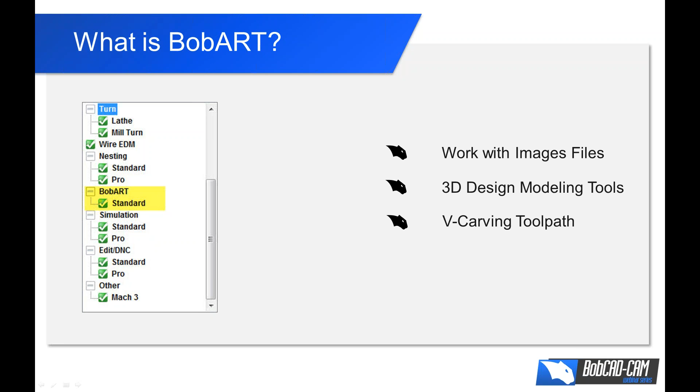We're going to take a look at how we can use each of those different aspects of the software. If you aren't sure whether you have BobArt or not, you can go to your license and see whether it's checked on or not. If you want to add BobArt, it's very easy to add. You make a purchase, they unlock it to your license, and you'll have availability to it.

The next thing we want to look at is who uses BobArt? Well, BobArt is used by anyone working with image files and non-mechanical elements of their designs. Common for woodworkers, job shops, manufacturers, and more. It's probably our most popular software, and anybody with a CNC that wants to do some cool artwork, engraving, or logos, BobArt's for you.

Now, what are you going to learn today? Today's webinar is an introduction to the 4 main features or tool sets that BobArt brings to the table. We'll go through a sample of each, so you have a working knowledge of what can be done with BobArt and how you might use it in your shop.

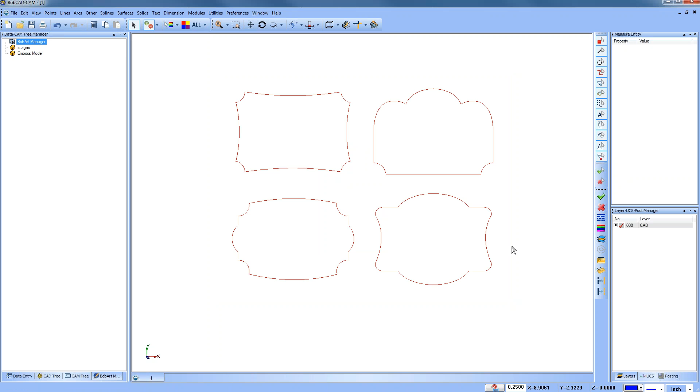So in this example here, we can select some of these different colors here. We can go ahead and delete them. We can select our color white. Maybe we'll change the color of it to gray so you can see how we could grab the center line for it, or we could grab the outside shape. So I just wanted to bring that up. That's something that you do have to pay attention to.

The next thing that we want to talk about here has to do with what's the difference between vector-based files and raster-based files. Well, vector-based files are going to be made up of lines and arcs. If we look at our entity summary here, you'll see that there's 422 or 424 entities, 158 lines, and we have 266 splines. So vector-based files are going to have lines, arcs, points, splines, that kind of geometry.

Now, raster-based files, those are really going to just be pixels. They're pictures, and there's a lot of different types of pixels and pictures as far as file types that you can work with. So where can you load in the raster-based files? The raster-based files you can load in from the BobArt Manager. You can choose Load Image, and then you're going to have all of these different files that you can work with.

One way you can do it, again, is from the BobArt Manager and load images. The other way you can do it is from Images and choose Load Images. Both methods will get you there. So we have our raster-based files. Now, as far as the file types that are supported, there are a lot of different file types, JPEG, bitmaps, TIFFs, GIFs, PNGs, PSDs, and then like 30 other ones that I don't typically use. So you have a lot of different options in here.

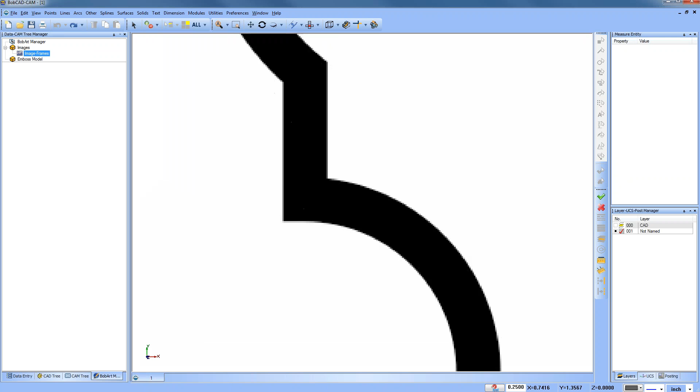All right, so what do you have to watch out for in raster-based files? So let me go ahead and load up an image here. It's going to come up on the screen, and then I'm going to zoom in, okay? So if we zoom in, you're going to notice that there is some blending on the edge of this part where it goes from black, and then it gets lighter all the way out to white. The best image-based files to convert are ones that have a lot of contrast. That's really what you're looking for.

A question did come in about the BobArt Manager in BobCAM. I'm not sure of the exact workflow of BobCAM right off the top of my head, but it is very similar. It's a little bit different because you have to align to a sketch, and I may post a follow-up video for you on that or look back to some of our webinars to explain that, okay?

So again, raster-based images, they're pictures, they're made up of pixels, and what you're really looking for is good contrast, because the better the contrast is, the better the conversion process. You can work with black and white photos, you can work with color photos, so it's definitely important to understand the quality of the image that you're working with.

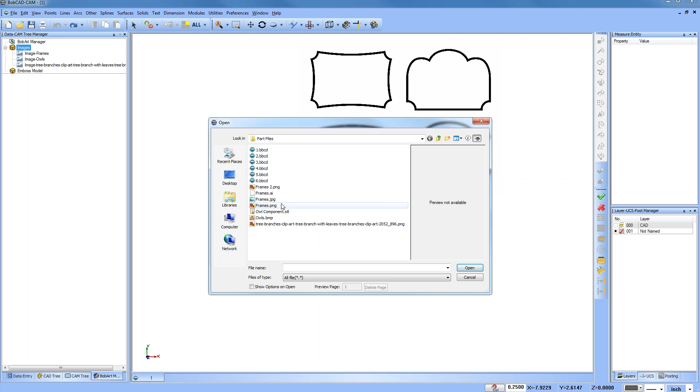Now, another thing you may not know is you can also load in, so I'm going to go to images here and I'm going to go to load, multiple files as well. So I'm going to grab this owls image. I'm going to come in here and grab a tree branch, and I'm going to load in another one. So one of the things that's kind of cool about this is you can take different design elements that you may want to work with, different logos, frames, characters, or whatever it is, and you can load them all up into one file. I feel that this is a very useful tool that you have.

Now, right now, all of these images are loaded on top of each other, so you can go to each one and choose blank and unblank. What that will do is blank them out, and then you can choose to unblank. Again, this is a right click. This one here, I believe this was the PNG file. If you look at the contrast of this image, you see a lot of different shades of black and gray. What the software's got to do is figure out how to join lines and arcs for that. So again, the better contrasting images do give you a better result.

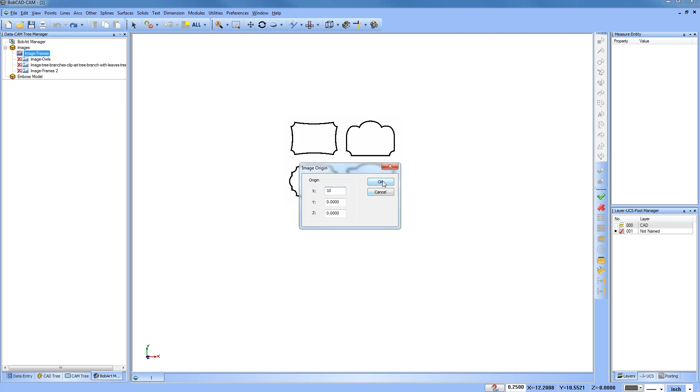Now, one of the other things that we want to look at is right now all of these images are kind of stacked on top of each other. So you can also change the origin of the image. When the image comes in, it comes in right on 0, and then you can change the origin. So we could move this maybe 10 inches over in X. We'll unblank this one. Now we can see that one. So we're going to change the origin, we'll say minus 10 inches, and then we'll push that one that way.

We got our tree branches here. We'll maybe change that one, and we'll say minus 10 in Y. And then we can open up this other one here and either leave it where it is, or move it up as well. So we're going to move this up 10 inches in Y. Okay, so now we have multiple images, we can blank them, we can move them around so that we can start working with these raster files.

Okay, so we covered change origin, we covered blank and unblank. Now, there's another thing that you can do with these images. You can see this one is smaller than this one. You may want to edit that image. Now, generally, when you're editing, I recommend you do it in a program outside of BobCAD, and you do it before you get into BobCAD.

But you can go to any of these images, and you can choose Edit using Paint. It'll open it up in Paint, and you can rotate and scale it, make it bigger, make it smaller. You can save the file, close it, and then it will update for those changes. Okay, so if you did want to make some adjustments to the image, you can do it while you're in the BobART software.

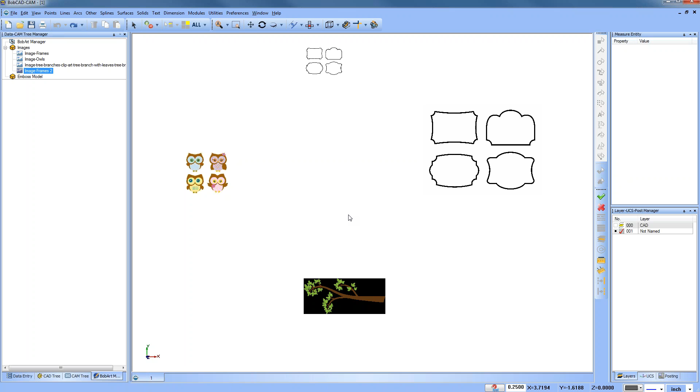Looks like we're good. Okay, so the first topic we covered is working with image files. We brought in a variety of different image files. We talked about the different types of files, some of the benefits, some of the differences, things to look out for, and how to move them around on the screen, okay? Now we're going to talk about converting images, okay?

So like the AI file, when we bring in the vector-based files, they're coming in as lines or arcs, so we can go ahead and edit that and start working with it, okay? So that in itself is really simple. We just need to check for double entities and clean up the geometry. When we're working with the image-based files, we need to convert it, okay? And there's two ways to convert it. One way is tracing, the other is vectorizing. So the first thing that I'm going to talk about is tracing.

Now you'll notice a little trick that I'm doing here. I'm doing this with my keyboard. This is I on your keyboard. If you press I, the image visibility goes away so you can see they're hidden. And then if you press I again, you'll see that they come back up. Okay, so this is a great way to load an image in the background, be able to trace around it and hide it, and I'll use that quite a bit.

Now, the first group that I'm going to go to is this group over here, and what we want to talk about is using line sketch. So you load an image up in the background and you want to trace it. There's a bunch of different tools that you can use, but the one that we want to talk about to begin with is going to be line sketch, or maybe line continuous. These are very good tools to use in order to trace around the part.

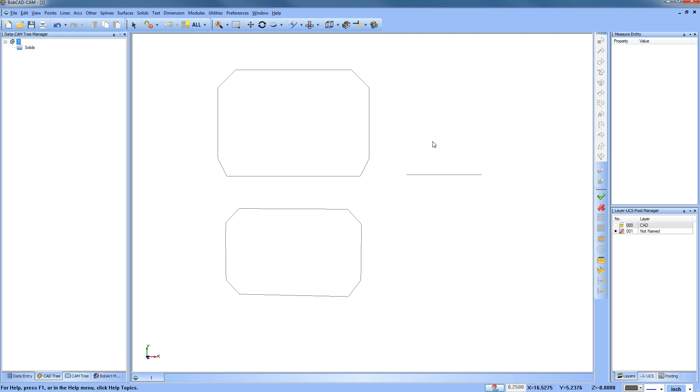Now, the next thing that I want to talk about is splines. Splines is probably one of my favorite tools that I use to trace around images. There's a bunch of different splines that you can work with. I'm going to choose the fit spline. Using the fit spline, I can plot out points on my screen to represent a curve or a shape that I'm trying to work with. So again, this is a pretty useful tool that will allow you to trace around images, and then you can use I on the keyboard in order to show the image or not.

Give me just a second, guys. All right, sorry about that.

Okay, so I on the keyboard to turn things on or off, and you can use splines to follow more curved shapes, okay? Another tool that you have is, once you get some of the base geometry down, what you're going to want to do is modify some of the geometry. There's a bunch of different ways to do it. We're going to talk about drag corner.

Drag corner is a great way for you to grab a corner of your geometry and then be able to move it. So this way you can start moving your geometry into the shape's geometry as such. Okay, so again, this is a quick tool that you can use to grab the intersection of geometry and move it to where you want it to be.

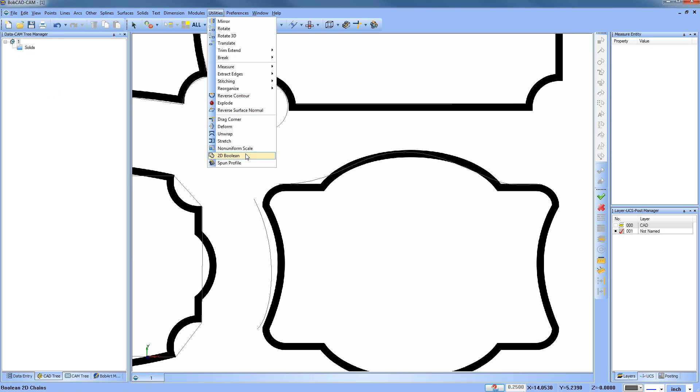Now the other thing with deform is I can go into this spline here. If I go deform, I can click on the spline and I can start dragging the spline into its shape as well. So that's another very useful tool when you're converting images. All right. Now the other one I want to talk about is entity modify.

So if you have a line or arc that's on the screen, you can select that line or arc, and then you can go to entity modify, and then you can change its radius amount, its center position, and this works for single entities. This again is a very useful tool.

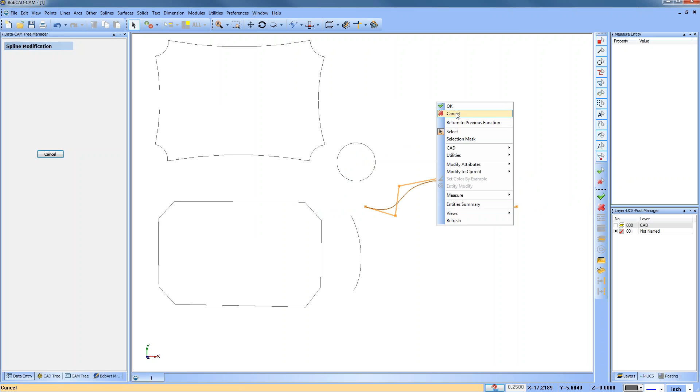The other one you can use it for is with splines. If you do entity modify, all the control points come up so that you can pull on these control points, and again it's just another way to modify your curved profiles. All right, so that's what we're looking at on that. Are there any questions about tracing, some of the tricks that we have for tracing? Anything that you guys think of, just go ahead and write it in the question box there.

These are very common tools. I'm very familiar with using these tools, and really using this workflow, there isn't really much that you can't do, okay? So in other words, if I go over to this shape here and I start looking at the splines, this is probably a better example of using the spline. I can come through and kind of click through close to where I want it to be.

Then I can come back and select the spline and go to entity modify, and then I can use my control points in order to get this closer into the profile that I want to work with. And you can zoom in or zoom out. You'd kind of get a knack for how many points you need to create and when you need to create them. But again, this is a good way to take more complicated shapes and be able to generate splines through them.

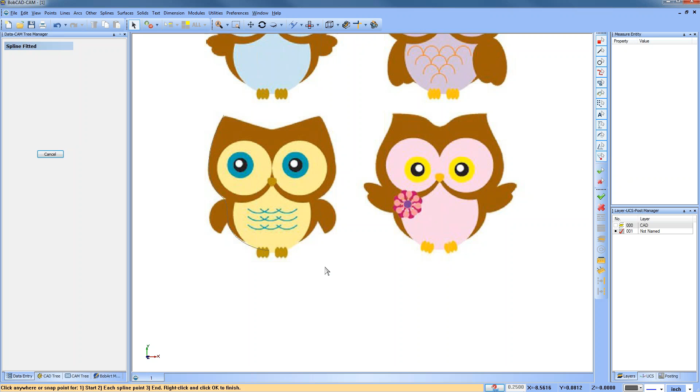Okay, if we go over to this section here, same type of scenario. It might be really difficult to create a series of arcs for that. So this is another great example of using the splines, so you can kind of click them out and be able to follow over the profile. Okay, so tracing is more of a manual based process, but a lot of times you're going to find that this is very useful in order to get some more complicated geometry or just portions of your geometry.

Okay, is there a simple select image and trace, aka simple trace? We don't call it simple trace, but that is the next topic, so that's a great segue, Curtis. The tracing methods are manual, where you load an image up and you use your general wireframe tools and you trace over it. The next one is the vectorization, and the vectorization is an automatic process. So any of the images that we have within the tree, you can right click on it and then go to vectorize, and this will bring up the raster to vector conversion or the vectorization process. Okay.

Robert had a question. Can you add additional points to an existing spline? You cannot add additional control points to a spline. You can break a spline into multiple points, but you can't add additional points to a spline. Anthony had a question. Can you use line join on different splines and lines? You can use line join on the end of any endpoint, or I think snap points too. So again, manual process is tracing, automatic process is vectorization, okay?

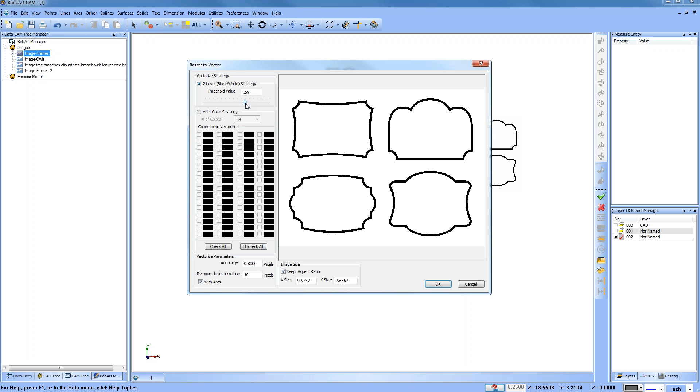When you get in here, there's a few key areas that you want to look at. You have a threshold value here, and the threshold value really is going to depend on the image. The threshold value that you set will determine some parts of your design that are white, and some parts that are black. It's kind of like a contrast tool, and depending on where you have this set, it changes your image depending on the contrast of your image.

You'll also notice there's a multicolor strategy, so if you have multiple colors, you can pick 1, 2, 3, or all the way up to 64 different colors. We're going to talk about the vectorize parameters here. There's an accuracy setting based on pixels, remove chains less than, with arcs, and then we'll look at our image size. Okay, so if we go to this image here, this is a JPEG, and it's really a nice image.

We're going to go to the image and choose vectorize. There's very little that we need to do in this dialog other than click OK. And then what we'll see is our result. You can see that we have really clean corners and a good representation of the geometry. There's a little bit of a facet here that you're seeing. The facet would be based off your wireframe rendering. If you increase that, then you'll see your arcs smooth out.

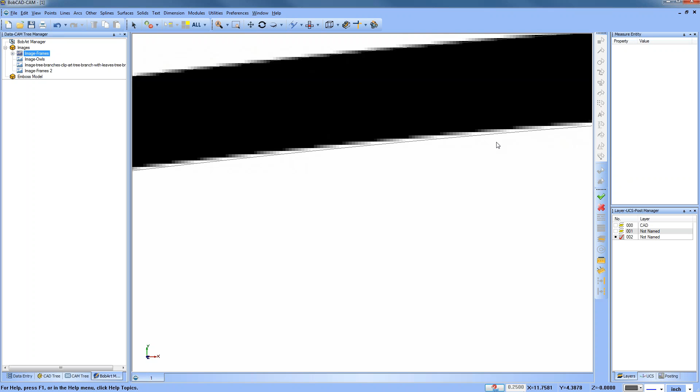Okay, so that job went really well off of the JPEG image, and you can see how it's approximating all these points here, and it's done a really good job of it. Now, if we come over to this other frame here, which is a little bit different, this one was the PNG, and if you look at the starting geometry that we're working with, we get in real close, and you can see there's not as good of contrast with it.

When we vectorize this using a similar setting, we'll say OK and zoom out here, and look at our geometry, you can see that in some areas it's not quite as smooth as it was in the other example. This is based on the contrast of the image.

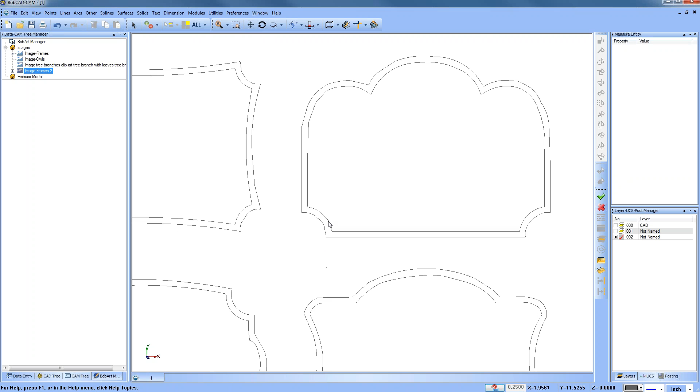Depending on what you're doing, like V-carving or embossing, a lot of times those little details aren't really going to make a difference on your finished project. I did a sign for my sister, a real estate agent here in the Tampa Bay area, Abbey Road Realty, and I just took her logo off her website and vectorized it. It looked a little rough, but when we cut it on the router, it was no big deal at all.

Talking a bit about the threshold, we talked about automatic vectorization. Let's look at an image where the threshold shows up more. We'll go to the owls here, go to vectorize, and this is where you can really see how adjusting the threshold value makes a big impact on our images. As we bring it down into a lower number, we lose more of the image. As we go into a higher number, we get all black, and eventually we lose it altogether.

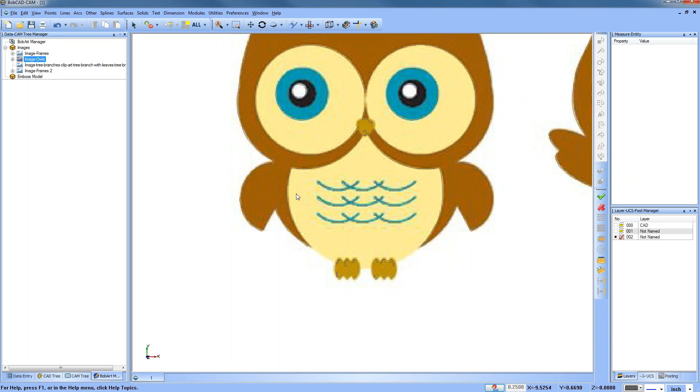This allows us, on this multicolor image, to come in and adjust this, and you can see the result we're getting from that. If we zoom in, you can see it's very pixelated. This is actually a very small file, and you can kind of see the result we're getting based off of it. All right, so that's a little bit about the threshold value.

The next thing I want to talk about is multicolor. With our owls here, we have a bunch of different colors we can work with. We'll go to multicolor, drop it down to maybe 3 colors, and just choose the color brown, then choose OK. That's another way to isolate what geometry we want to work with and what we don't.

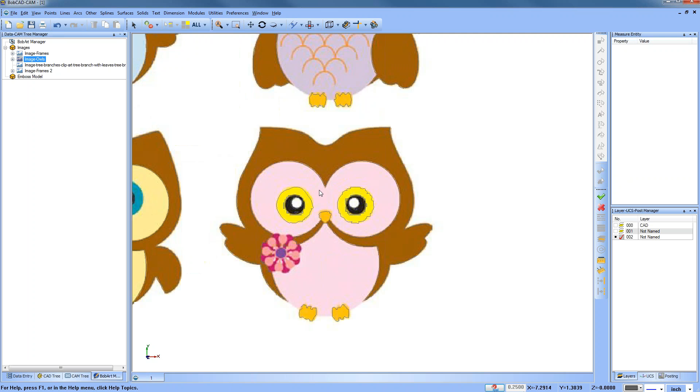Now, a lot of you may be saying this doesn't really look like the smoothest interpretation of that image. And you're right, it's not necessarily the smoothest interpretation, but if you look at what we're starting with, it's actually doing a really good job based off the quality of the image, okay?

Now some of you may be saying, well, what can you do to adjust the quality of the vectorization? Actually, there are a lot of things you can do. Number one, you can start with a better image. You don't always have that option though. Maybe you don't have an art department.

Let's see, can you please show how you changed the wireframe?

Steve, if you're asking about the deform function, I'll get into that in just a second.

Maybe you don't have an art department, maybe the customer doesn't have an art department. If you have an art department, you go to them, work with them, and get back a better result. If you're grabbing an image off the internet, or from the customer, and it's just poor quality, you may manually trace some of the image, or auto-vectorize some of it and use a combination.

I do want to talk about going to another multicolor image. This one has a few less colors. We'll go to vectorize, then multicolor, and drop this down to 3 colors. Maybe we just want the brown. We click OK, and that gives us the brown, more like the branch versus the leaves. Again, this shows how you can isolate different areas.

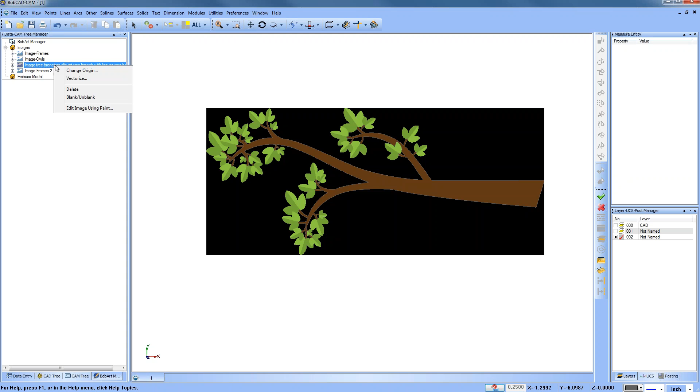We can go back to vectorize. Maybe we just want the leaves. We can go to green, and in this case we're just getting the leaves. Now someone did ask, okay, let's say you auto-vectorize it and want to clean it up - what are some of the options you have?

Okay, this one's a little rough in here, but you might want to smooth it out. Again, you can go to utilities. You have drag corner and deform that you can use to modify that profile. To go to deform, you can click on this arc and bring it in.

One of the things I can say about the BobCAD's vectorized profiles is these are closed chains, made up of larger geometry segments, so there's not millions of little tiny segments. These are not very heavy files. These are very usable files, whether it's engraving or continuing on with more of your 3D design.

Okay, so we talked about multicolor. Really what we want to get into now is more of the accuracy. So we have a couple of different examples. This example looks really good. This example doesn't necessarily look as good. When we get over here, this one looks like it could use a lot of work.

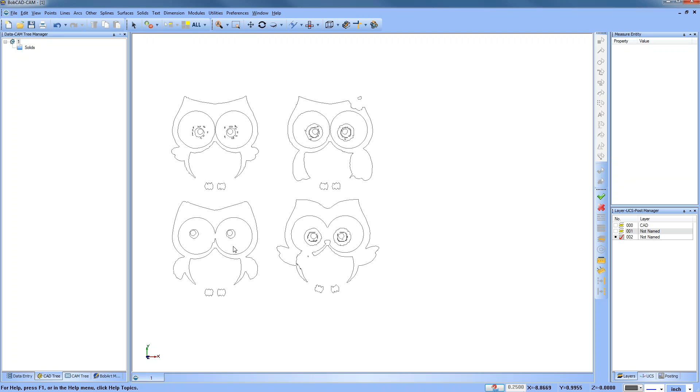And then when we get down here, you can see, depending on what section we have, it's really not so bad. Okay, and when we look at the images, you can see there's a lot of high contrast. When we look at some of the other images, they don't have as high of contrast. So what can you do to clean up the vectorization?

Well, one of the things that you can do is, let's go to frames 2 and zoom in here. One of the things you can do is you can adjust the accuracy settings. Now, to be honest, for a long time, I never messed with these numbers. When we get into the vectorize parameters and accuracy, I never really messed with them because I guess I would just manually trace it since it was easy and quick for me to do. But working with this presentation today, I really dug in a little bit deeper. So this is what I found.

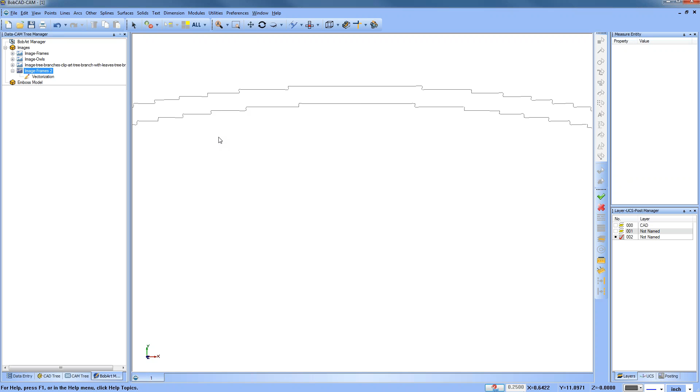When you drop this down to a smaller number, what you're going to get is a bunch of staircases. This is really going in and following that profile quite a bit. And that is definitely not usable geometry, unless you're going for...

What is that video game everybody does nowadays, the block video game. But anyways, I can't think of it. No, not Candy Crush. Minecraft, yeah, unless you're going for a Minecraft style, thanks Steve.

That's probably not what you're looking for. If we come in here and go to vectorize and bump this number up, like I'm going to make it a 5, and say okay, what you're going to see is it definitely smooths it out, and these are like really big segments. See how that's one arc? This is one line here. This is one arc, okay?

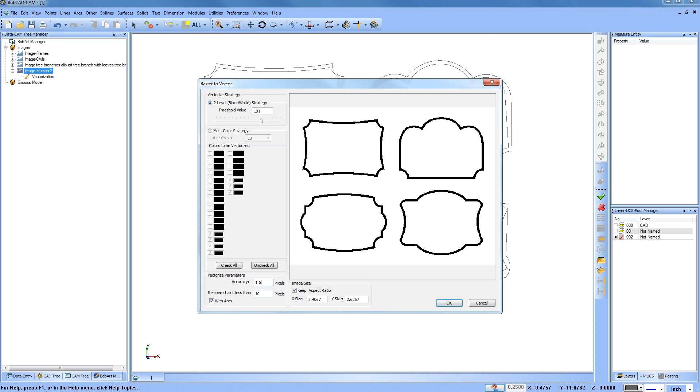So there's somewhere in the middle where it's really faceted to too smooth. I don't know the actual technical definition of what it's doing there, other than it does smooth it out, and you can find a threshold which will work for you. I've been finding that about 1.5 a lot of times will give me a pretty decent result, but again, it will depend on the image.

The other thing you can do here besides adjusting the accuracy is you can go in and say remove chains less than however many pixels. So if you make it less than 5 pixels, it removes chains that have less than 5 pixels, and you can go up from there as well. If you work with this a little bit, I think you'll find you can really come in and dial in a lot of images that may have been more difficult to work with.

The other thing you're going to notice here when we go to vectorize is you have with arcs or without arcs. I generally recommend with arcs. If you go without arcs, it tends to really make it more faceted because now it's just joining with a bunch of line segments versus using arcs. So that covers our accuracy settings.

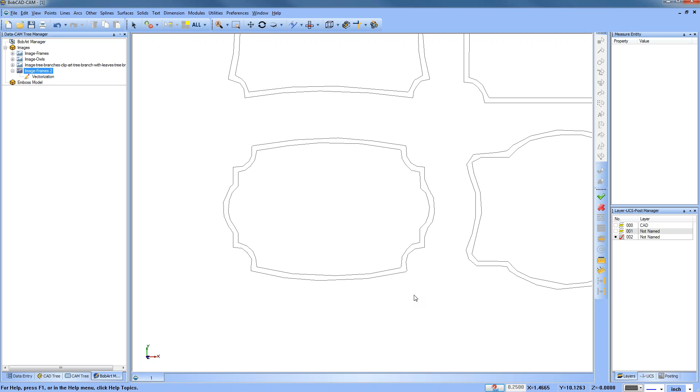0.8 is the default. You can go up or down and see the result. You have remove chains less than, which allows you to get rid of smaller segments of geometry that could be problematic. And then you have with arcs, which will allow you to smooth things out.

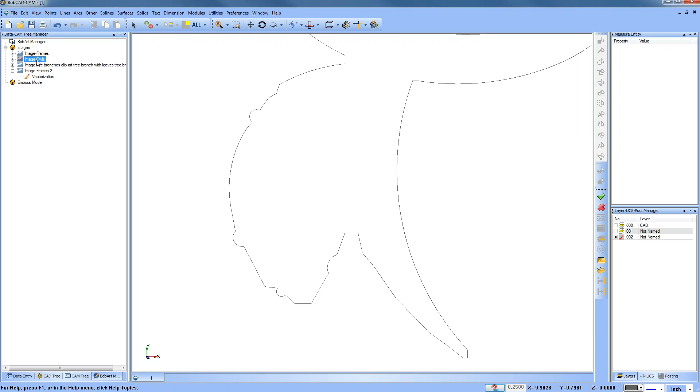Again, if we go over to the owl here and go to vectorize, we can adjust our tolerance, and you'll see that it has a pretty impactful effect on what you're working with. There's quite a difference between that one, and if we come back and make this 0.8, you can see it's quite a bit more faceted. You can see these smaller sections in here. When we come in and vectorize it again, let's really zoom up here and recompute this, you can see it really does smooth things out for you.

Okay, so definitely work around with that a little bit. The last thing that I want to cover with vectorization is you can make the image larger or smaller when you're vectorizing. So if we go to the owls here and go to vectorize, you will see this image size, which shows you what the actual size is. You can type in the size that you want it to be, and when it vectorizes, it will make it bigger or smaller. So that is a good way to do it as well.

Is there a limit in sheet or drawing size that it can be? Can I do a 100-foot part? I don't know of any limit in the size that you can vectorize, but if it's a 100-foot part with a bunch of smaller segments, it could be a really large file. It could be very resource intensive on your computer, so that's just something you need to think about. Other than that, I know of no restriction based on file size.

All right, very good, so that's going to cover that. Is there any other questions that we have there? No? If we do have about vectorization, go ahead and bring it up now. Otherwise, we're going to move on to our next topic, which is V-carving.

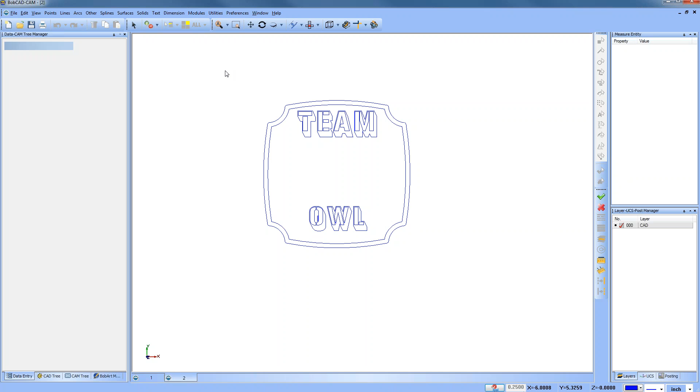All right, sounds good. Let's see, one came in. I know we have a parallel line at a distance. How about arcs or radius lines at a distance? No, but you can do an arc snap, so you could snap to a position. But if you're saying I want the center of this to be a distance away, you might do an arc sketch and then do a fixed amount, and maybe you'll put it there, and then once it's dropped, you could move it. You could say, all right, let's go -1 inch from there, and then it will move that center. So that's kind of how you would do that.

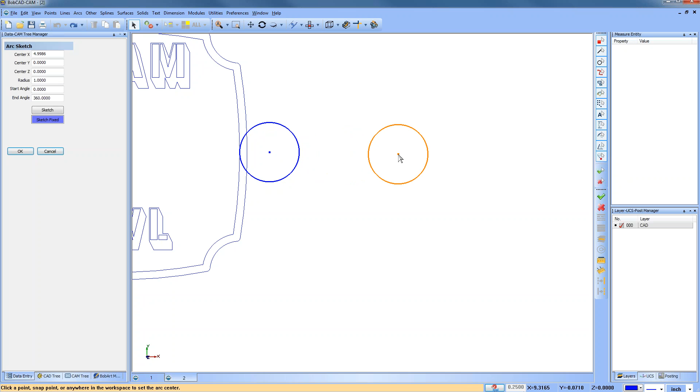Let me go through that again real quick, because that might be a useful tool. We're going to go arc sketch, do a fixed amount for our radius, and snap it to a location so it snaps right on the center of that arc. Then we want to tell it to go a certain distance. So from here we could say, all right, go plus 1 inch, tab in order to have it come in there, and you can see now it's 1 inch away from there, right on that edge. I'm in a preview mode right now. I could either continue to add to that value, or I can lock it in. So if I spacebar and lock it in, it's going to drop right there.

Okay, Martin, does that answer your question? It looks like a very usable solution for you there.

All right, so I'm talking about V-carve at this point because the BobArt package does include V-carving, and I think that's a big part of why people use it. V-carving for signage. I also have people doing like dies and stamps with the V-carve toolpath as well. So even though I'm showing more of a sign type example here, it can be used for other applications as well, like stamping dies.

Now, so V-carving. So we got a job set up here. In here, we're going to right click, and you're going to notice Mill V-carve is one of your toolpath options. So we're going to go ahead and click that. From here, we're going to select our geometry, and I'm going to select Team Owl - kind of like Team Owl, but with an O, WL. All right, so we'll select that.

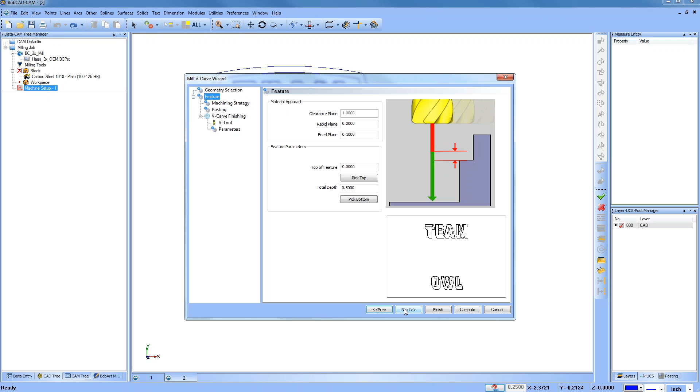The next thing that we really want to talk about, and it can be a little confusing here, is the depth value, as far as what that is. But really what's going to happen is the toolpath is going to go until it intersects with each other. That's how it works with the V-carve. We're just working on the letters.

I do recommend you use the largest V-tool you can, especially for wood-based applications. The other thing that I recommend as well is that for your V-tool depth of cut, you make that as large as you can. This way it takes the least amount of passes in order to create the V-carve routine. So we set that up, we hit compute, and then here you can see the toolpath.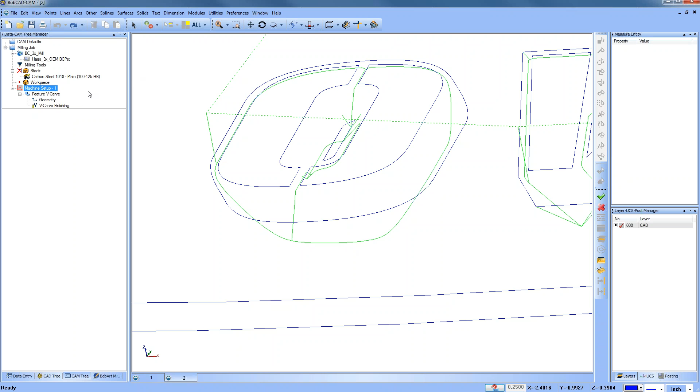And again, where it is a narrow space, it will be shallow, and where it's a wider space, it will go deeper. That's kind of how the algorithm works there. That is the concept behind V-carving. You will see that it will go down the corners, it goes up along the skinny area, it goes around and cleans it up. We can run this through a simulation in just a second, but that is the basics of V-carving.

You can use V-carving for just in between two areas as well. It's not limited to just text, okay? Again, the depth is going to be based on the intersection of the profile. So if you have a greater area, it will go a lot further down. So it's just something to be aware of there. So we have some basic V-carving.

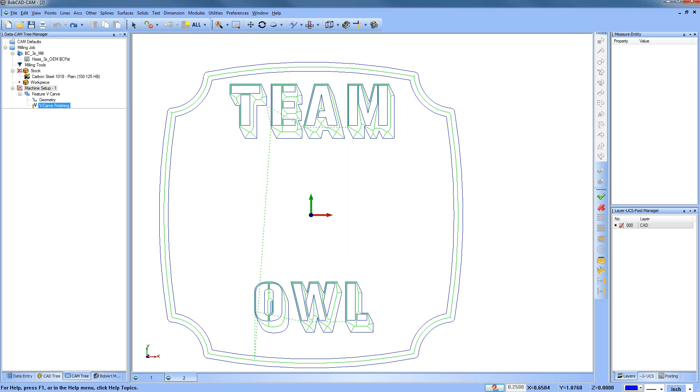Something I want to touch on real quick, which is good to know: if you do have some text on the screen, I don't recommend you explode it. Or if you do explode it, make sure to make a copy of your text so that way you have the original. The reason why I bring this up is you can go in and adjust your fonts for your text when it hasn't been exploded. So you can come in and get more of a scripted type text here. Again, you can select it, you can change the text.

You may say, oh, I changed the text, it's bigger now, so you may change the height of it as well. So this is an easy way to swap out your text. You can go ahead and reselect your geometry, you can recompute, and then you can see it's updated for a different style font. So that's just a quick tip on V-carving with letters.

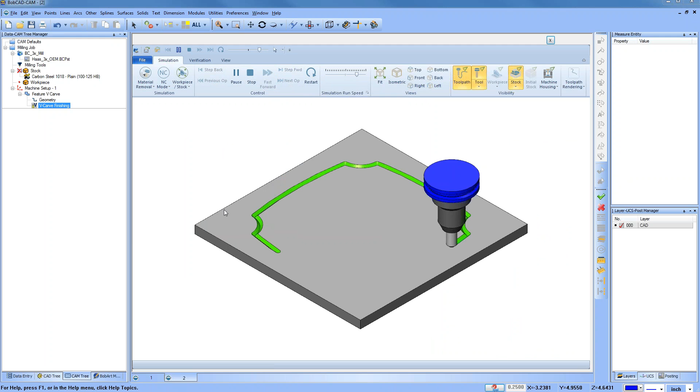Let's go ahead, I'm gonna run it through a simulation here, just so we can kind of see what's going on. Again, I recommend you turn all this stuff off because unless you're using it, why have it on? We'll come in here, we're going to just press play. We'll have it run through and you can see really what it's doing, the difference of the font.

Now, a lot of people have questions about fonts, like, Al, where'd you get that font? Most of these fonts were installed on my computer. Some of them I grabbed off of our network drives here. It's TrueType fonts and OpenType fonts that you can work with. Most fonts work really well. There are some fonts that are a little problematic just because of how the font is itself. So if you're having problems with a particular font, sometimes it makes sense to switch over to another font, okay?

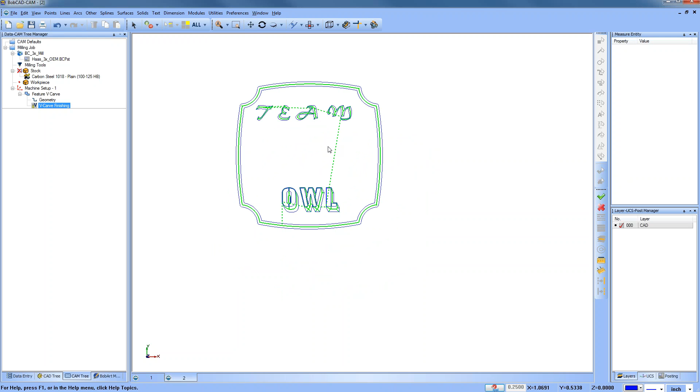So when you take an image and convert it, you did that with BobArt, or a combination of BobArt and your own geometry, you can come in and use your V-carving. V-carving for letters or shapes is a really good way to attack different things. The other thing you can do here is, let me remove this, and I'm just going to select the inside shape and our two font sets, and I'm going to edit this, and I'm going to add tapered pocketing to it as well.

And the reason why I do this is I want to remove all the area between the outside shape and the text, and it's better to use an end mill to remove the bulk of that material. So I can go in and set an end mill. I can set its depth parameters. I can set my V tool, and I can set its depth parameters. I can go ahead and compute that. And then what this is going to do is it's going to cut down to the depth that I set here.

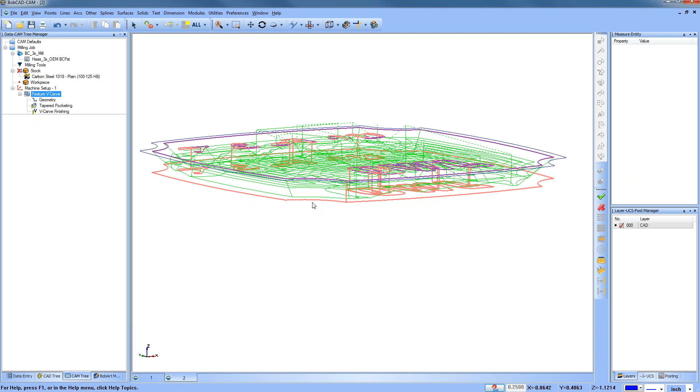So when you're just doing V-carving, the depth is going to be based on the width of the letter or the boundary you've selected. When you're using the tapered pocketing, it's going to be based on the total depth that you set. So we can set this to 1/4 inch and update it, and then that will push that up. And what you're going to see is it's going to remove around all of that text.

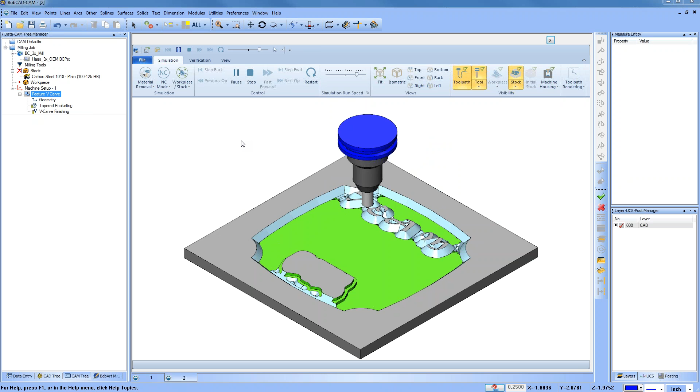We'll launch simulation again real quick, kind of see what's going on. There are some things that happen when you use this end mill. It's going to rough out the majority of the material, and then we're going to go back and clean this up with our V tool, right? So there is a gap between where the end mill went or could fit, and where the V tool went and could fit. So you have some different settings within the software for cleanup, and I'm going to show you what those are as soon as this gets done.

The other thing you can do too, I don't know if you guys saw the custom tool profile. Most of these tools have a small flat that's on the bottom. The virtual tool that we create does not. You can model a tool that has a flat on the bottom or create a custom profile for it, and that way you get a better idea of what's going on.

So the cleanup stuff that I'm talking about is in this section here. You can see there's some leftover material here and here. You'll also see material left over here and here, and in through this section. So you have some options to go in there and clean that up. If we close this out and we edit this feature, we can look at our V-tool parameters. You'll see V-tool cleanup parameters. You can make this a smaller number, and that will go and clean up the corners.

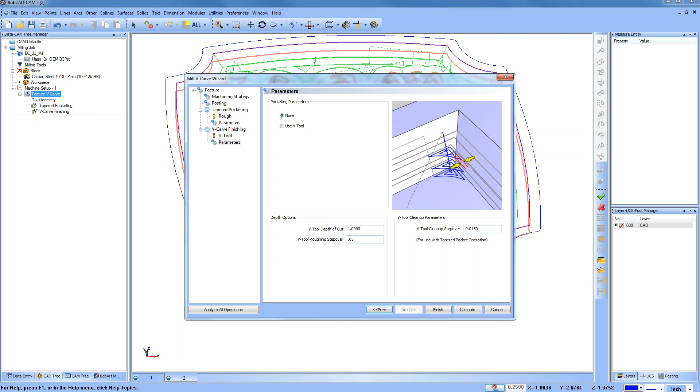This one here is the step over option, so you can make this a smaller number so it steps over more when it has an area that it needs to generate. So if we recompute this, you're going to see this area is filled in now to clean up where that extra material was. You can see over here and over here, a combination of those two options, both the cleanup and the step over. So hopefully that makes sense.

Can this be used with a CO2 laser? Larry, I mean, V-carving? I don't think so. You'd have to give me a better idea of what you want to start with and how you want to use it, and we could do a one-on-one or something about that later, okay?

All right, so tapered pocketing we covered. You pick your tool, you set your depth of cut, you set your step over, and then we also talked about the cleanup stuff. All right, so that gets us through V-carving. If there's any questions about that, go ahead and ask it now. Otherwise, we're going to move on to the emboss model creation with the BobArt. Any questions? Last chance. All right, moving forward.

Now, what I want to do from here is let me go ahead and just delete this feature out of the tree. Let me bring this back to this. All right, so the BobArt software, one of the things that it's going to have is the design elements, okay? So we talked about working with graphics files, vector-based and raster-based. We talked about converting them, tracing them, or vectorizing. We talked about V-carving, letters and pockets and shapes and things like that.

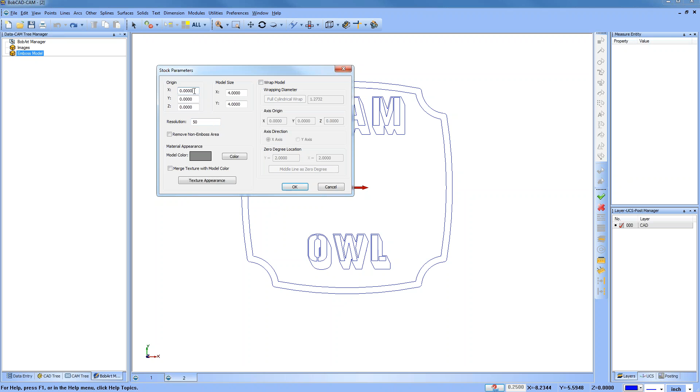The origin is going to be the bottom left-hand corner is 0, 0. If we make this a 10 by 10, what we're going to see is that this box comes up here and it's not oriented to the geometry. Now, we generally draw geometry on center so you can take advantage of mirror and rotate. So you can either choose to move the design elements, the wireframe, to the surface, or you can move the surface to the wireframe. Either way, in our case, what we're going to do is just go back to create, modify, stock. We're going to come in here, we're going to say -5, -5, and what that will do is center up our stock geometry.

Now our stock geometry is a flat plane like I talked about, and what we're going to do is start building up or dropping down different features. The first group are embossing features, okay? So when we get into the tree here, you have emboss regular, emboss swept, emboss 2-rail sweep. So these are your embossing features. These are the most common ones that you use. So let's go ahead and take a look at it.

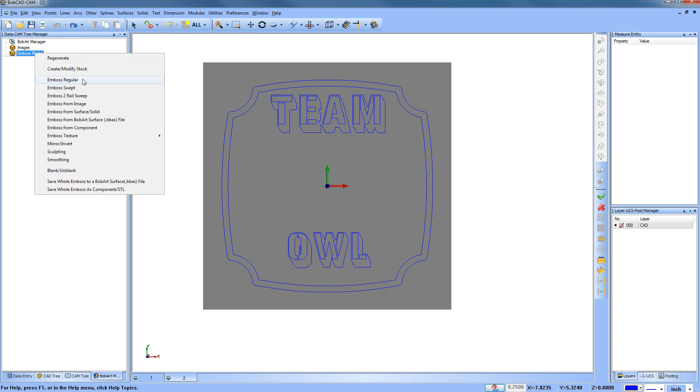So we're going to do emboss regular. We'll load that into the tree. We get into an interface here. We can name it. We can change the color of it. This view that you're looking at is a cross section. So you can use a line, you can use an arc, concave, convex, ellipse, and then also a spline, and then you can also use a custom profile, so you can draw and create your own custom profile and be able to use that as your cross section.

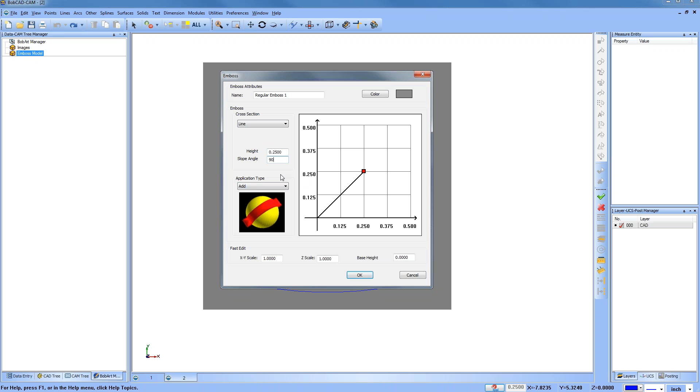Okay, for our example, we're going to just do a line. We're going to say a height of 1/4 inch, and then a slope angle of 90. The application type is going to be add, and we're going to choose OK. All right, so I need to select the geometry, so I'll chain select my outside profile here, hit my space bar, and then once you've created an embossing feature, you edit its parameters, you select the geometry, then you need to compute it, kind of like you compute a toolpath, except it's regenerate here, so we regenerate, and that will give us this shape, which went from a flat plane to one that's sticking up in Z. So that's an add example.

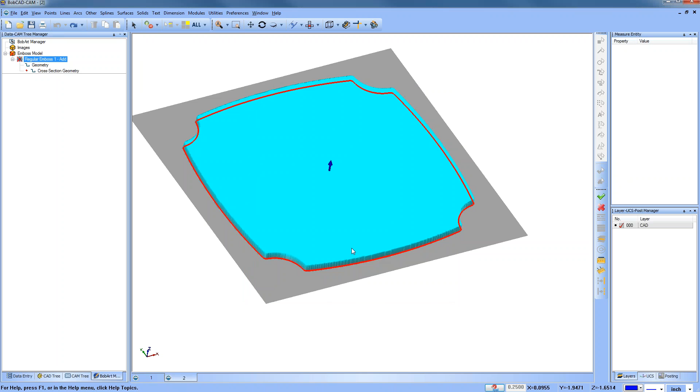What I'm going to do is edit it. I'll make it a different color so it stands out a little bit. So we'll make it blue. Click OK. You can see that it's blue. We can come in here and edit things like the height of it. We can make it taller. We could make it 1 inch. We could edit the angle. Maybe it's on a 45. You know, it's really simple. You just edit the parameters, and then when you want to see the change, you regenerate, and then it changes.

So this put it on a 45 and went up. Now you can go up or you can go down. If we edit this shape, instead of adding, we could say subtract, and we can choose OK. And then we come back over here and do regenerate. You can see now that it's gone down. So you can go up or you can go down.

Will you be doing an emboss from image? Bob, I'm not planning on doing an emboss from image, though I could take the owl's image if I wanted and emboss from it, so maybe we'll get to that. Trying to get through all the topics here, so if that is something that you want to see, we can talk about that. All right, so you can go up, you can go down, okay?

There are a few other types, application types. You have up and down, so add and subtract. Then you have merge high and merge low. And merge high and merge low comes into effect when you have other embossments, and either you want to add to the embossment or subtract from the embossment, or only merge at the high points or only merge at the low points. Okay, so a couple of different options there.

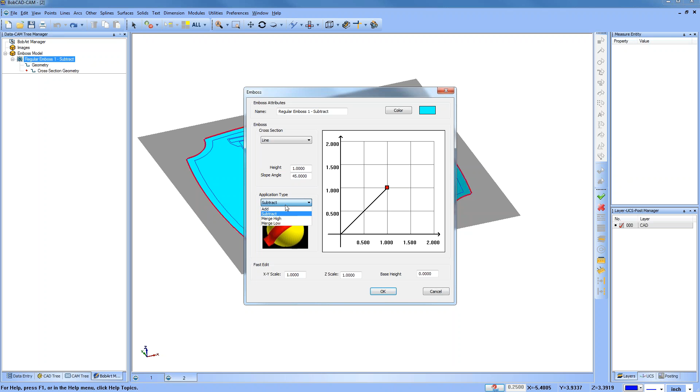We're going to go to an add. We're going to set this to a 1/4 inch. We're going to say this is 90 degrees, or we'll set it to a 1/2 inch, 90 degrees, and we'll say OK. All right, we're going to regenerate, and you can see we have this going up. And E on your keyboard is the hotkey for hiding the embossment, so you can use E.

There is a question about a sweep, and I am going to show a sweep in this example. All right, so E will hide your embossment. Okay, so that way you can get to the wireframe, because I moved the emboss model up so we weren't able to see. What we're going to do is add another regular embossment.

This one is going to be a line again. The height is going to be a 1/4 inch. This is going to be 90. We're going to do a subtract, and then we'll change our color. We'll make it green. Say OK, OK. Select our geometry. Regenerate our path. E to show it. So we went up and then we went down. Pretty simple. Okay. Now, let's go ahead and edit this feature here.

There are some things that I wanted to talk about down here, these fast edits, like what is a base height, Z scale. You have scale in X and Y and scale in Z. Those, I think, should make pretty good sense. I don't know that scale in X and Y really did anything for me right there. I think scale in Z should make it smaller or higher. The scale factor, yeah, that brought it up.

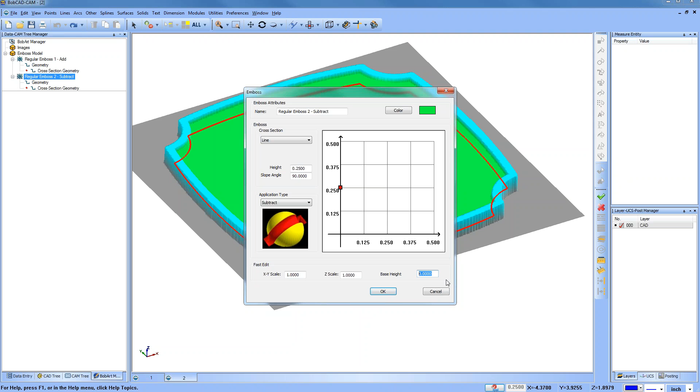But before I skip ahead, we did one regular embossment to add. We did another regular embossment to subtract. We're going to do another regular embossment. We're going to do a line. That's fine. This one's going to be a subtract. We'll use a different color here, a color like that. All right, E to blank everything out. I'm going to select the text here, spacebar, regenerate to update for the changes, E for embossment.

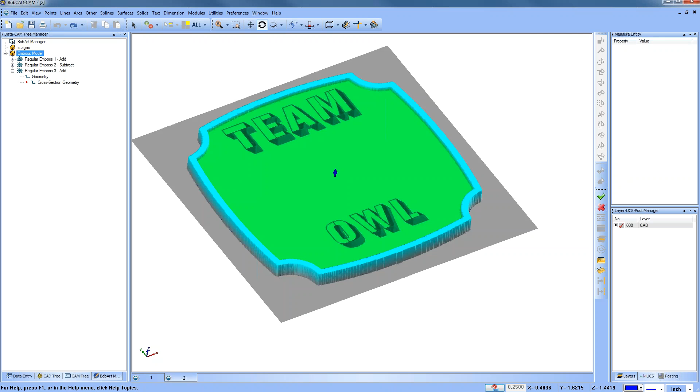Okay, so I'm building up and down my design. I'm going up and I'm going down. Hopefully that makes sense there for you guys. What I'm going to do is change this one here from a subtract, make this one an add, choose OK and then regenerate. Okay, so now you can see these letters have gone up.

But I want to use that base height where I want to make it start from a higher position than the surface that is there. So I can go edit, base height, 0.25, click OK, regenerate this, and now you can see how they go up. Okay, so that's the purpose of that base height. When I didn't use the base height, what was happening is it was embossing from the green surface up based on the regular emboss value that I had put in there.

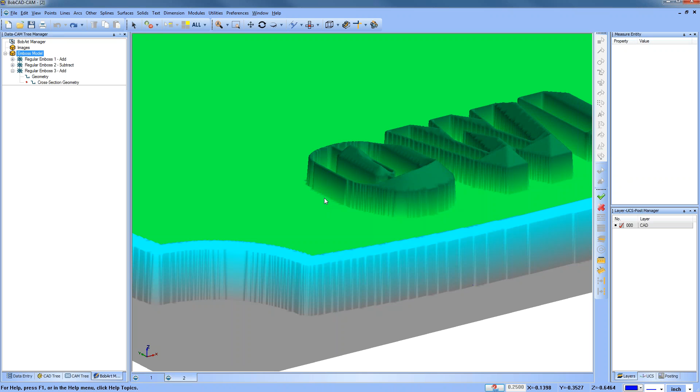When I use my base height, what I do is I say move up off of the green surface by a user defined value and then emboss from there. So it's a very useful tool to customize your design. So that's just a quick demonstration on that.

This one we're going to go back to subtract. So hopefully you guys have a good understanding of emboss regular and adding or subtracting. I don't know, now it's going way deeper than what it should be. So let me just delete that guy real quick.

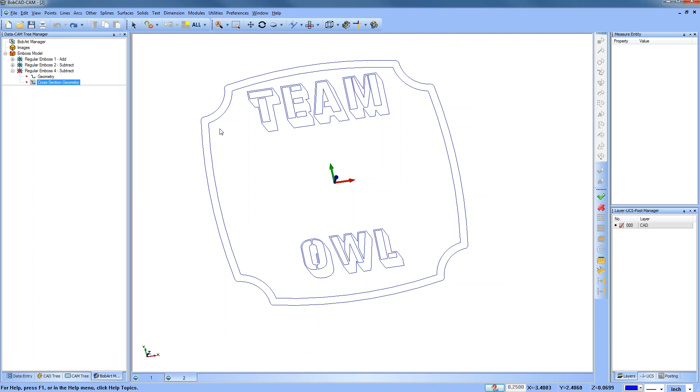Now, some of the other things that you can do here is you can suppress features, you know, like turning operations off in the CAM tree, same type of thing. You can suppress features, so this way you can turn elements of your design off and you can turn them back on later. If you go to any feature, you just right click and you can do suppress. You also will see save as component STL, and this is where you start talking about using parts of your design in other parts of your design.

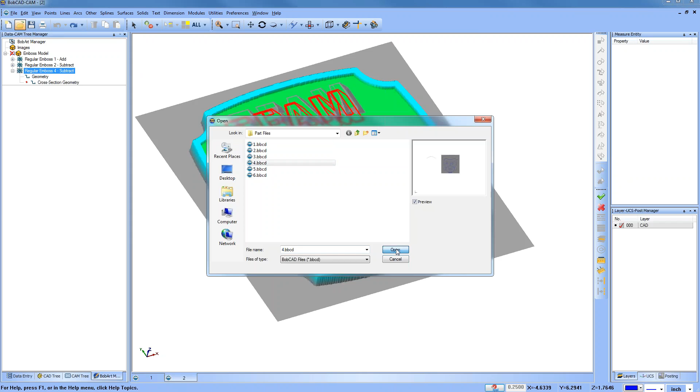Okay, so we talked about add and subtract. Really, those are more of the basic ones. What I want to do from here is get into a little more complex of a design. So we're going to go to the owl here. All right, so this is the same owl that we had worked on before. If we go to our image file, I feel like it should show up here somewhere. I may have pulled it out. It was the same image that we had used before.

Okay, we're going to go through the same steps here. We're going to do our stock. So this is going to be an 8x8. And we can see that it covers that area. Okay, now what I've done is I've put all of my sketches or my wireframe on different groups here. I'm going to drop some of these off the screen so we can look at one at a time.

So this one here, this is a two-rail sweep. Okay, so this is another kind of embossing tool. So regular is definitely the most popular, but the two-rail sweep also is a very useful tool. So we're going to do 2 rails. Again, we'll set a color that we're working with. Okay, this is going to be an add. There's some different options in here. There's some really cool stuff that you can do. We're going to just stick with the default settings and click OK.

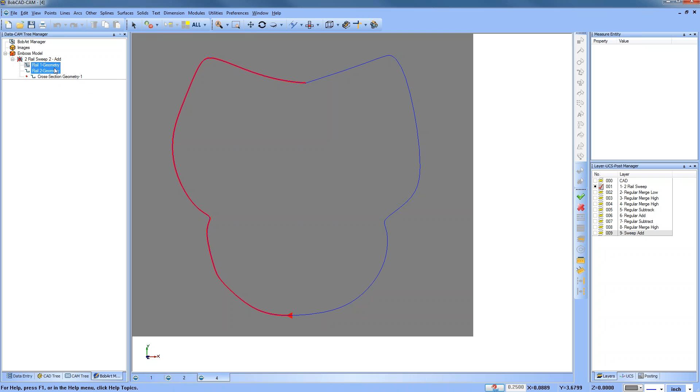We have 2 rails to select, so we'll select the first one, which is going to be this one. We'll come over and select the second one, which is going to be that one. All right. Now, one of the things that we do need to pay attention to is the start point. You notice how this start point is up here and that start point is down there. We do want them facing the same direction. Okay, so you can see how they're both going the same direction. So there's my 2 rails.

Okay, and then what I can do here is select my cross section. So my cross section is kind of like the front view, and my 2 rails are like the top view. So when I generate this embossment, what it's going to do is it's going to dome that up just like you see there. And I would say 2-rail sweep is definitely the most useful tool to create more 3D curves. A lot of the blended type shapes that you would want to get into, you would use the 2-rail sweep for.

Larry, the lithophane based off embossment feature is super easy. It takes 2 seconds to really show. So no big deal. We can get into that later. I think you're over at the BobCAD Texas user group, so I'll try to post something up in there later.

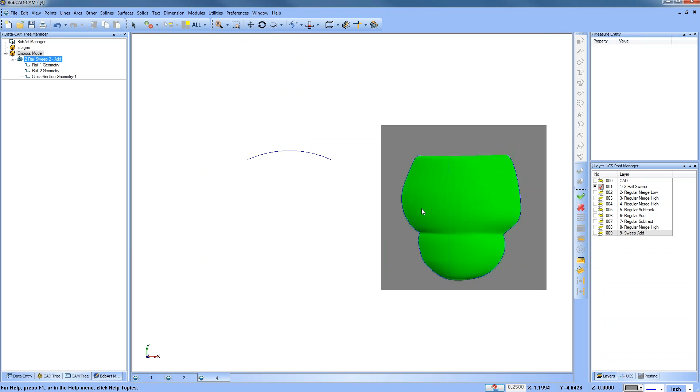Okay, so this is, like I said, the front view of the embossment, and these two would be more so the top view. So we've got one there. That's one part of our owl that we're making here.

The next thing I do here, if we look at it, it's got this curved shape to it on the top. So what I want to do is cut that part away. How do I cut that part away? It looks like I do a regular merge low.

Okay, so we're going to come in here. We're going to do a regular, this is going to be a line, I'm going to go 90 degrees. I'm not sure, we'll make this like 1 inch. That's fine. We're going to select our profile.

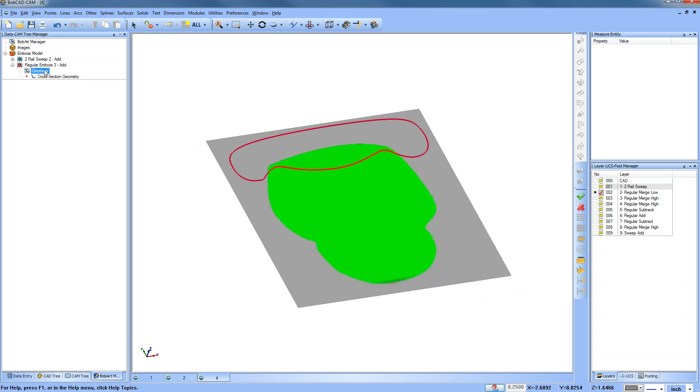Okay, so we select our profile here, and then again, our application isn't going to be an add, we'll do an add first, and you'll see that it goes up like this, and you can see when it runs into this green surface here. Let me change this green surface.

When it runs into this green surface here, it also goes up in that area. So that's when you do an add, if there's other embossments, it adds to those embossments as well.

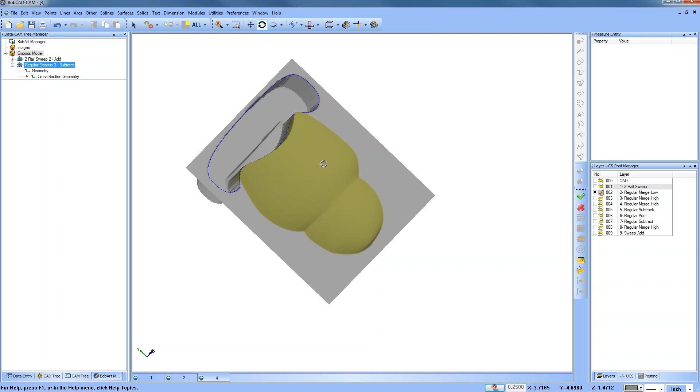Okay, so really what we want to do here, if we do a subtract and regenerate that, then it's going down, and yeah, that accomplishes the result we're looking for, but it also creates this big pocket back here, and we don't want that either. And even when you do the subtract, you can still see the embossed curve on the bottom is still there.

Right, so that's where you start getting into this merge low. So when I do merge low and then regenerate this, that's able to cut away that profile there, but not go up or go down. It allows me to cut off the top of it, basically, is what's going on there.

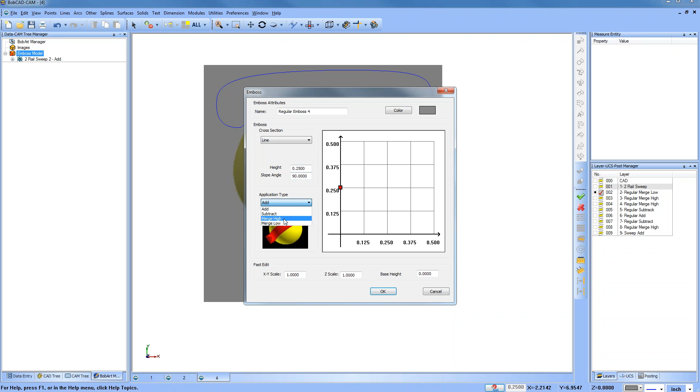Okay, so let me go ahead and delete this guy here for a second. I'm going to load another one in. So we're going to do regular, we're going to do line, 90 degrees. This is going to be merge low. We'll select our profile, and then we'll regenerate, and you can see how this cuts this out.

I know it looks like I don't have my height quite high enough, so let's make this a little bit bigger. Click OK, regenerate, and you can see that I'm doing something wrong. I'm not sure what I'm doing wrong, but I got something wrong here. All right, well, I set it to 0 and that brought it down, so that works.

Okay, so merge low, I guess the height would be the height at which it's merging low. So as I set this to a quarter inch, it was merging at a quarter inch height from that, from the 0 embossment. See how it's merging at a quarter inch? If I come in here and set it to 1 inch, then it's going up even higher.

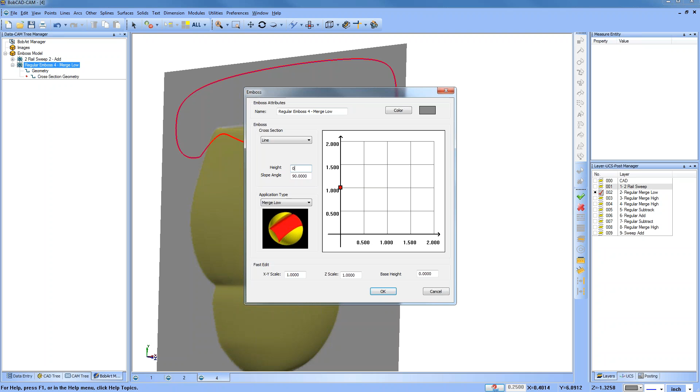So when I regenerate this, it's going up even higher, so we're losing it all together. When I set this to 0, it's saying merge low at 0, then it's cutting it away like I would want it to, and you can see I'm getting that dome section there, okay? So hopefully that explains what's going on there.

The next one we're going to do is go over to these other sections here. These are, let's see here. I feel like these are two rail sweeps, but I don't have the other geometry, so let me just do a regular. We're going to do maybe something like an ellipse, like this.

We're going to do an add, we'll select this one and that one, and regenerate. And then you can see, again, this is another scenario where the add, it's going up on the original two-rail sweep surface, right? So we don't want to do that.

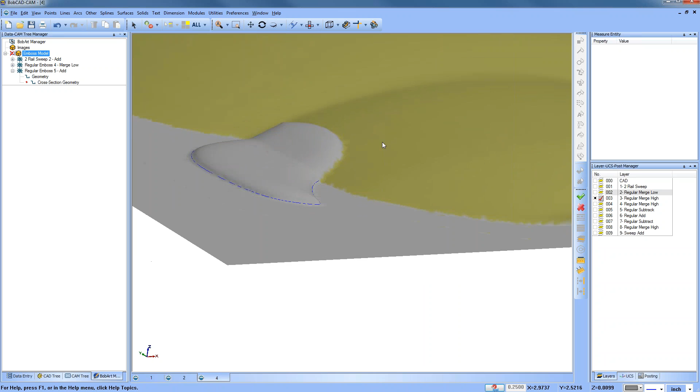What we're going to do is edit this, and this is going to become a merge high, which means it will only show up at the high points. So we'll say OK, and we'll regenerate, and you can see now those are going down inside of there.

And that's actually a really good point. When you look at our geometry layout here, you can see these boundaries are made inside of it, they're not right to the edge of it. And the reason why they're made inside is so when we do our embossment, we can use a merge high and have it hide inside of the body versus having like a gap or an edge right there.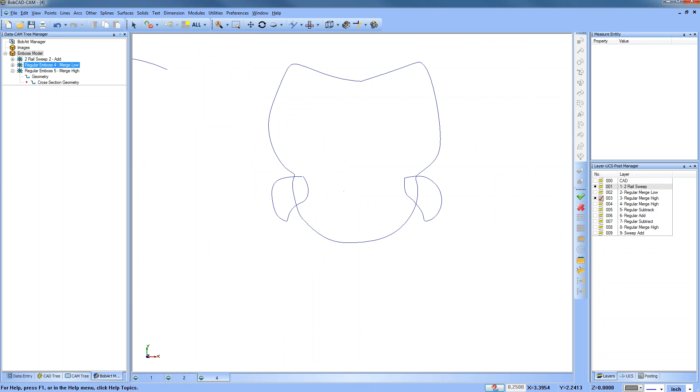So hopefully that makes sense there for you guys as well. All right, let's move on to the next one. The next one here, this is...

These are going to be regular embossments. What do I have it set to? Regular, merge high. So we're going to do regular, there's going to be some radius amount here. We're going to do merge high. We'll click OK, and we're going to select one of them and then do regenerate.

Some of you may be like, well, why are you doing just one of them? Well, the thing is, let's go ahead and select multiple ones. So this is another thing to watch out for. If I select a few of these together like this and I regenerate, you're going to find that where they intersect, there's going to be a gap there.

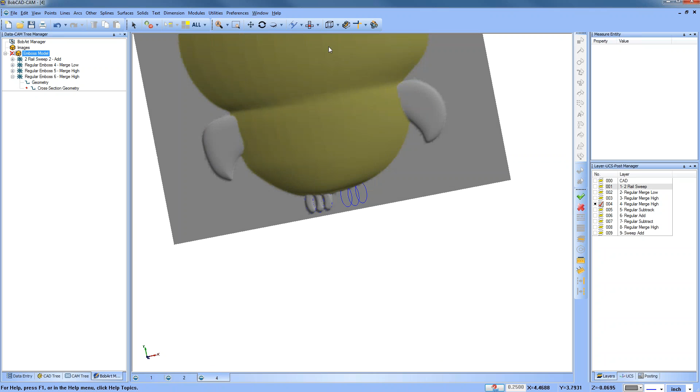Now this is a smaller detail, so because the resolution is a little bit lower, you're not seeing quite the same, but you'll see that there's a gap there. Depending on the design, it may be okay. Let me just up my resolution a little bit here and regenerate. So you can see the gap where the intersection is between the two curves here—this intersection, you're going to end up having a gap in that area.

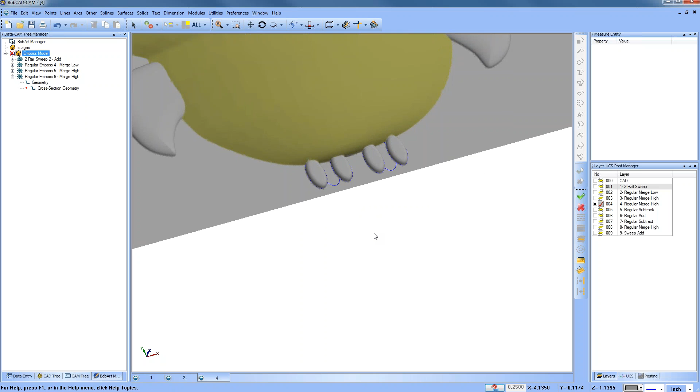Okay, so if you wanted them to show up fully, what you would end up doing is selecting the ones that aren't intersecting and regenerate, and then you can see those, and then you can do the two that are in the middle, so maybe you have them go up or whatever the case might be. Okay, so that's another thing to consider when you're dealing with geometry.

You want to make sure that if there's intersecting geometry, it will change what your embossment result will be. All right, so let's go back. Let's see what the next one is here. These are going to be some cutouts.

And sometimes this is confusing for people. So let's go ahead and pull this up and regenerate. And then here you can see we get a nice cutaway that is happening here, right?

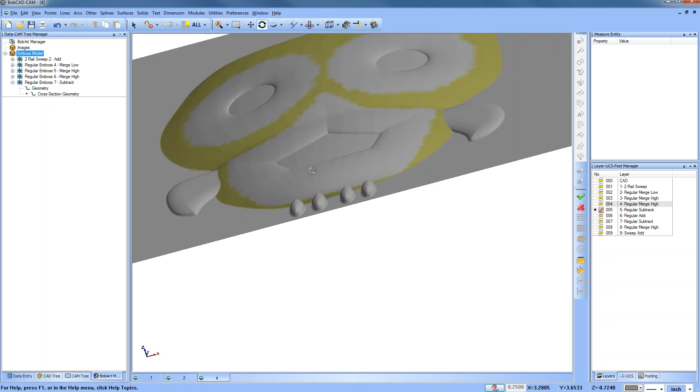So some of you may say, well, why wouldn't you just do, instead of a convex, just do a concave? And the concave is going to give you a different result. It's definitely not the result that you're looking for.

You could, I guess we could do an add. You could do an add with a concave and regenerate. That would give you, again, a different result. So even though you want to go down, you want to cut it away, you're going to find that using a convex and using a subtract is going to give you that recess that we're looking for there.

So we'll go ahead and regenerate that. Okay, so we're going up, we're going down, different steps that we're taking here. Let's see, these, I think I just build them up, so I'm going to do another add.

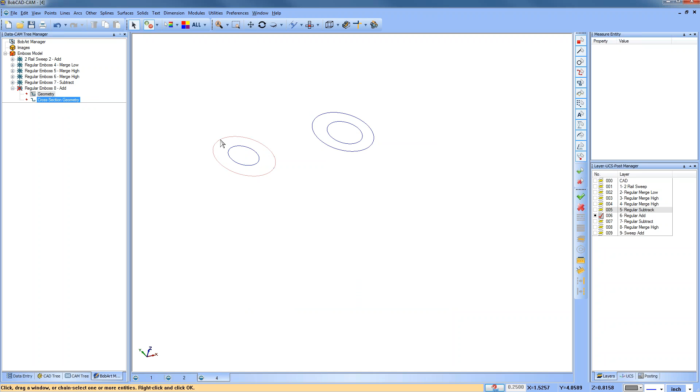So you come in and you do regular, something like this, and then you do an add, and we'll select these two. Okay, regenerate. Okay, so that's giving you an add, and we'll add them up and subtract.

I don't think—well, I guess there was one question about the sweep. So how do you do a sweep? So I'm going to just jump ahead to this one here.

Again, you're going to see a series of arcs. Now, the thing with the sweep that comes up—Chuck, if you're still with me—the thing with the sweep that confuses people, and I do understand, is when you do a sweep, it actually wraps around it, okay?

So we're going to do an arc here. We're going to do an add. We'll say okay. I'm going to select these single entities here as such, and you're going to see how the radius of it goes all the way around, so it sweeps around it. It's not like it only does half of it. It does all of it. It goes all the way around.

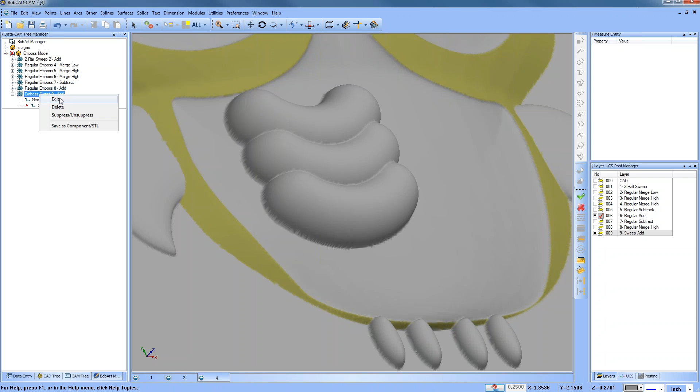So what you end up doing is just dropping down to like a smaller radius here, and you can see I get the result that I'm looking for.

Now that's with an open profile or a single open profile. If you had a closed profile, what's going to end up happening is it's going to go around it. So let me go back to a top view here, grab one of those and regenerate this, and you can see how it ends up creating a full shape around that.

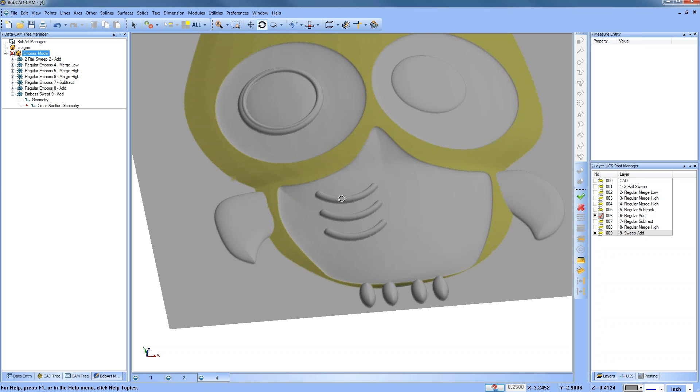Okay, so sweeps are actually pretty cool, but I think the way you were intending on using it was not what you were expecting. Are you using the spacebar to OK your selection? Is that a shortcut? Yes, that is a shortcut, Suzanne. Instead of hitting right-click OK, you can hit your spacebar as a shortcut for right-click OK.

All right, so again, the basic design elements are here. You can see how you can build this up. What I'm going to do now is just open up the guy—again, this is just an owl picture. My wife really likes owls, so this is what we came up with here.

Going through all the steps that I've shown you here, this is how I was able to create this design. You can see all the different ones that I've done. Same thing that we talked about here, so if I can do it, you can do it kind of thing.

Again, this is at a lower resolution right now. If we really want to pump it up, like maybe if we're getting ready to cut or save it out, you just increase that resolution and it will really smooth things out for you. Okay, so hopefully that makes sense.

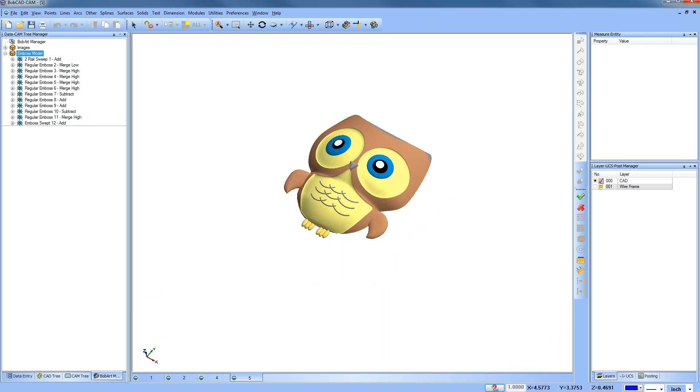Merge high, merge low, XY scale, Z scale, base height—all right, so these are your regular embossments or emboss features. The other thing I want to talk about here is when you get in, besides this first three group, you also have emboss from.

So you can emboss from an image where you can use the grayscale of the image to do an embossment. You can do from the surface or solid, using it as base geometry and then emboss on top of it. You can do from a BobArt surface, so if you already have a BBAS file, you could work off of one of those to combine components. You also have emboss from components, which is probably really where I want to go to next.

From image, let's go back for a second—we'll go to here, and we're going to do emboss from image. We can grab one of our image files here. What it's going to end up doing is using the grayscale of the image; even if it's color, it will turn it into grayscale.

This is going to come from 0. This is a 3, so let's do 3.7533 divided by 2, that's 1.8766. I'm just going to center it on the design, so that should be fine.

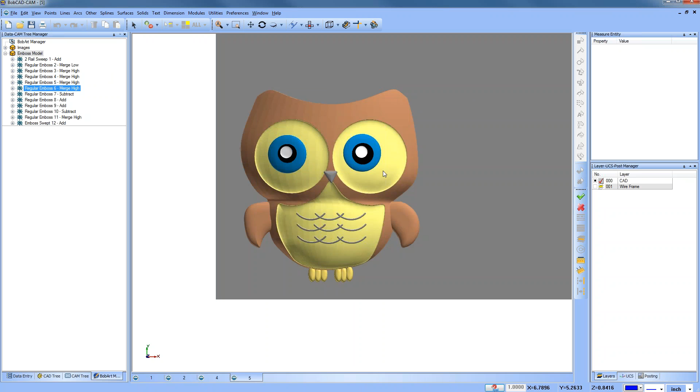Now, before you do that, there is one step that you have to take. When you go to your emboss model, this remove non-emboss area—what that will do is get rid of the flat surface that is outside of your embossed area, this whole sheet here.

Okay, so what it does is it trims it so you get just the component. And then, like I said, you can use that component in your design. So if we go back over to here, let's see this one, instead of doing emboss from an image, we can say, you know what, let's do emboss from a component.

So we're going to right click here, we're going to do emboss from component. We can grab our owl component. Our little dialog box is going to come up. This is going to give us the ability to center our image, so we can bring this over. We can bring it down.

The other thing we want to do is we want to scale this down because obviously it's bigger than our frame. So maybe we'll make it 4 inches. And again, we'll just move it until it's in position and we're happy with it. The other thing that you're going to look at here is suppressing the Z depth as well. I'm going to make it a little bit smaller.

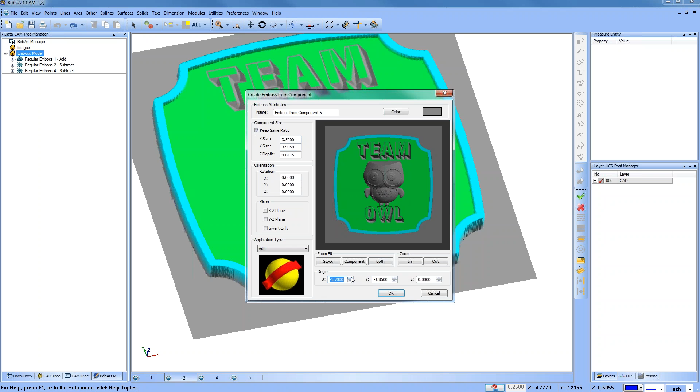Okay, suppressing the Z depth because you do got to cut this stuff out of material, right? So I'm going to leave this how it is. I'll say okay. I'll regenerate this and it's going to add our owl to our part. But if you look at this from a front view, we only have a ½ inch pocket area here, and this is going way over that pocket area.

So what would you do? What you would end up doing is you would suppress or adjust the scale factor for Z. So here you can see you have your Z depth. We could set this to what we have available. I think maybe in this part it's a 1/4 inch. So I'll set it to a 1/4 inch.

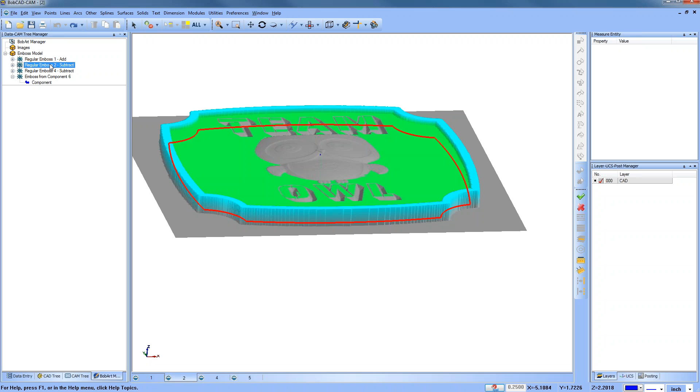I'll click OK. I will regenerate, and then what you'll see is now that's flattened. So it's staying inside of this area here. Let me see. What is this one? I'm not sure exactly of the depths here, but this one's add, this one's subtract, edit. This one's saying a 1/4 inch. We can drop it down a little bit more, to give us a little more room.

So that's gone down deeper, and then we can add from there if we wanted to go up higher. And you can just work with these different numbers until you get the result that you're looking for. So that is not what I wanted to do there, but that's okay. That is what we're talking about when we're talking about reusing elements of your design, your embossed models.

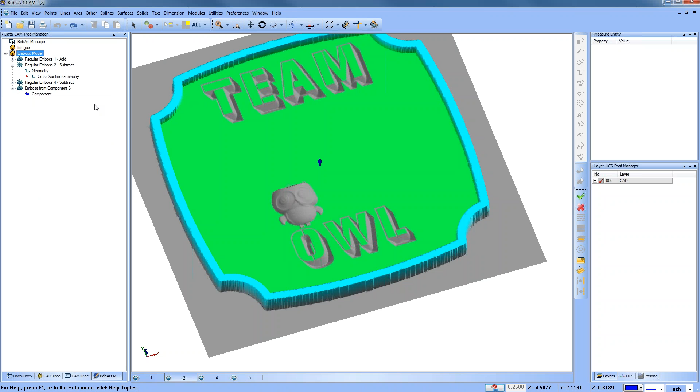Now here's the thing, you can design these your own, but you can also buy STL files. There's lots of companies out there that sell STL files that you can buy. There's our DXF clip art files. You can take them and convert them into 3D shapes, doing exactly what I'm showing you how to do here. So very powerful tool that you can work with, and really allows you to expand upon the kind of work you can push through your shop.

And I know I got a button wrong here, but I know that this is more of sign making as an example, but again, it could be logos if you're a manufacturer, if you're a job shop. I mean, this kind of stuff definitely comes up if you want to do some branding on your parts.